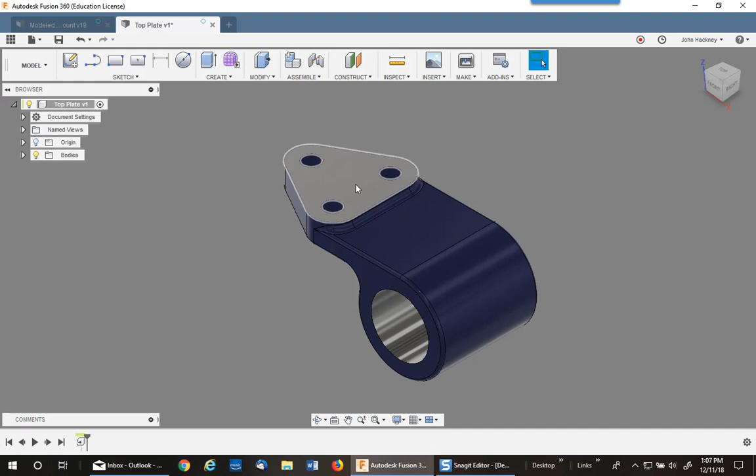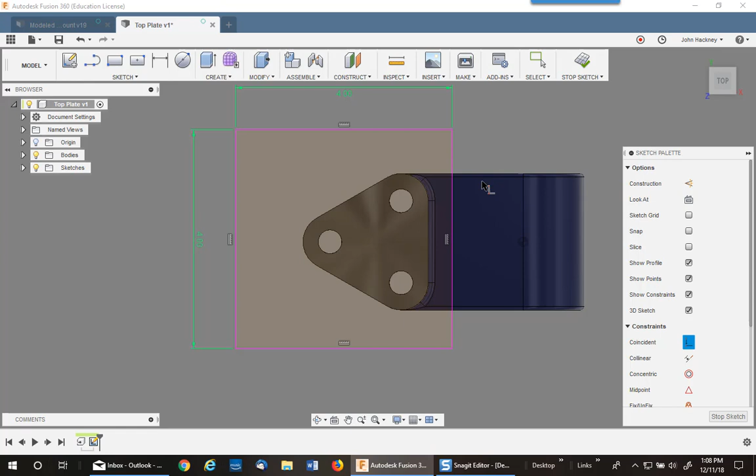Same procedure, now that we've got it into our top plate design, pick on this top surface and create a sketch. Draw the rectangle, dimension on the way, 4, tab 4, and then I want to hook it to the same place, use the same method, use coincident, hold down my shift key and pick on that midpoint and that midpoint. It's fully constrained.

Now create it. Remember, I have to pick all edges. It's always wise to make your features separate. And I want to drag it up a half inch.

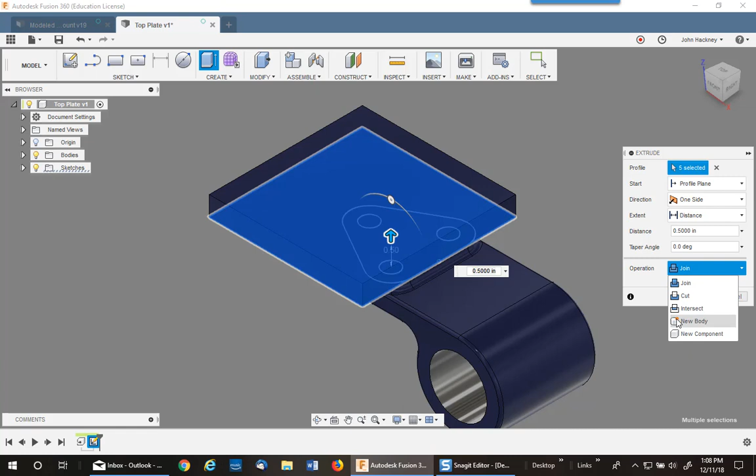I want a new component, or what do I want? I'm already in a component, so I don't need anything except a new body. That's a little different, I'm already in the component. I'm going to make it a new body. Say OK, so I have a component already with a new body.

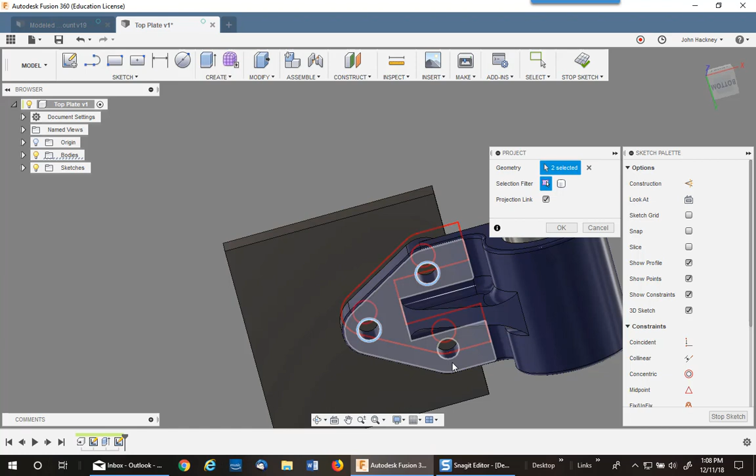Same thing, I go back and make a new sketch on top of that. Turn the part over and project geometry. Again, just do the holes, you don't need the whole surface. There are my centers again.

I'll go ahead now and create the holes. Pick on the holes, and they'll be tapped and all the way through with 3/8 16s.

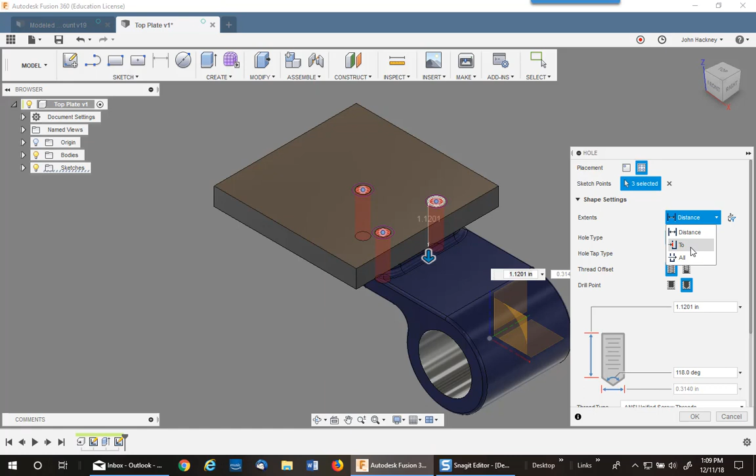Next thing I'll do is put the fillets. Nothing different here. And I'll make it a half inch.

So at this point we've got our finished part, the component totally, as a separate file. Okay, the next thing we need to do is remind ourselves that we have a derived component. That will be used in part of the updating process.

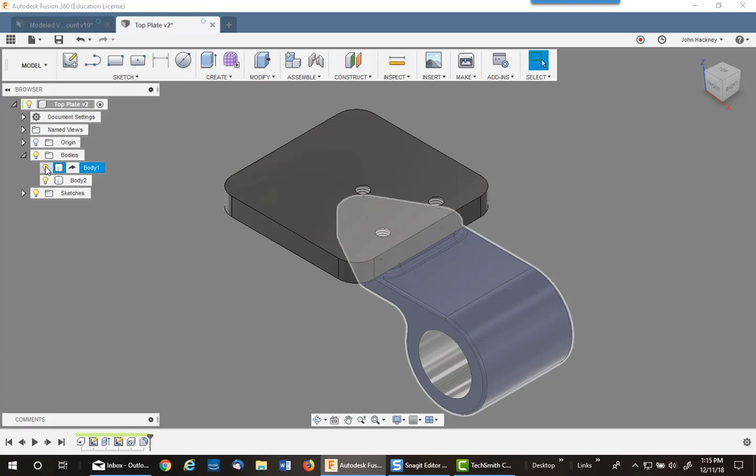Under the bodies, we want to make that body invisible. We then need to save the component to update all those settings. Back to our original assembly, we're now going to link it in. Go to our database, find that top plate, and insert into current design.

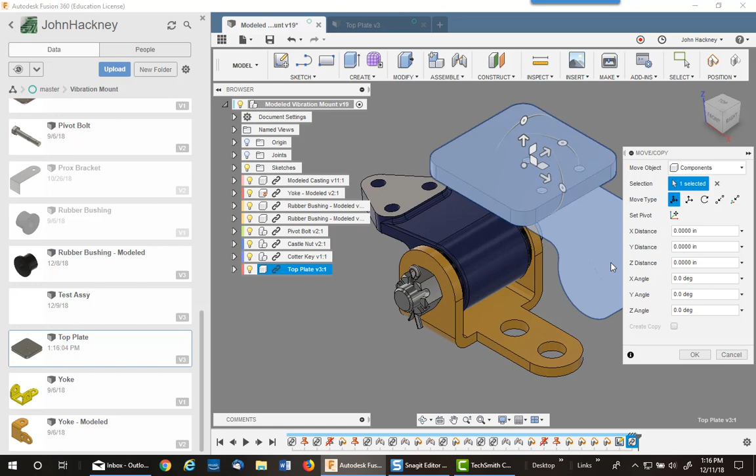Don't let the fact you can see that casting piece hooked to it bother you, that won't hurt us at all. Now the next thing you need to do would be constrain to place. So we can do that simply by doing a joint. We'll just do a rigid joint real quick.

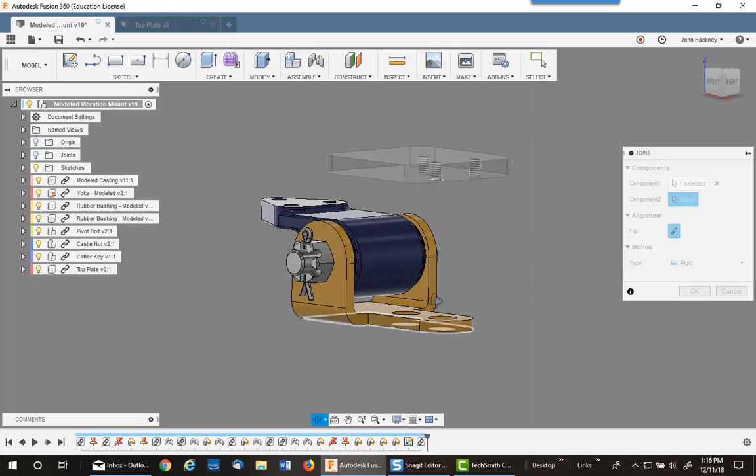From this center to this center and say OK. So there we go.

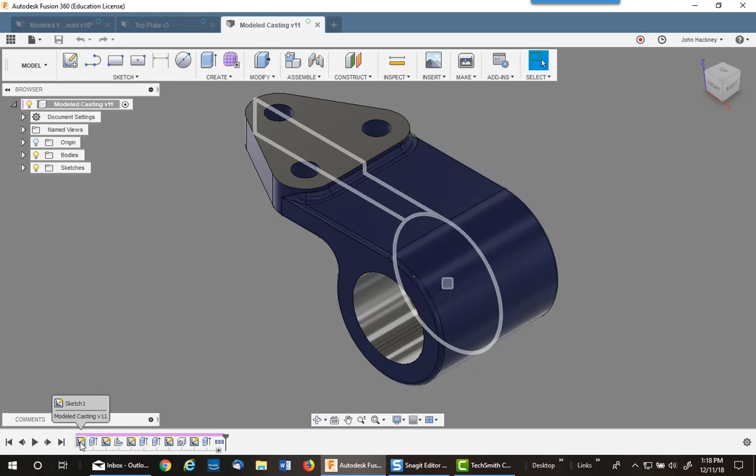As before, let's talk about the adaptive process. Now this is a linked file, so I go to this one and right click on it and say open. Now we're going to do the same thing we did before. We're going to change the sketch from 2 5/16 to 3. Stop sketch, save it.

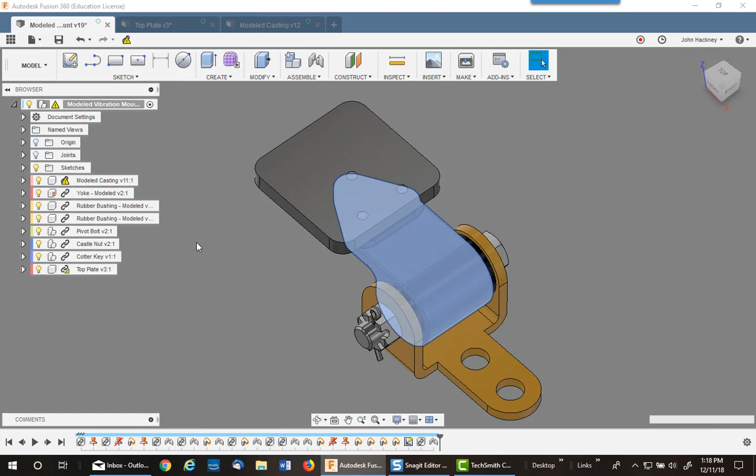Going back to our top plate, you'll see it needs an update, and you'll see the hole move. Going back to the assembly, same thing, you'll see it all updates. So the hole is moved to match up.

Let's do it, go back the other way. Back into this part, I'm going to go to the sketch, change it back to 2 5/16. Stop sketch, and it updates.

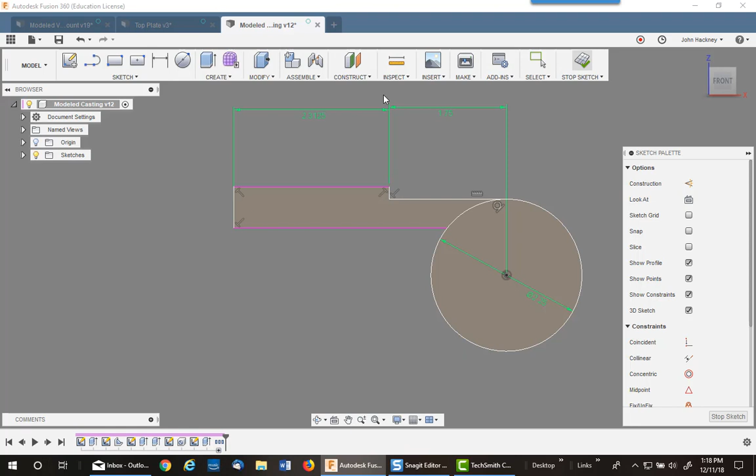Save it, I can close it at this point. Go to my plate, update. The hole moves back, I can close it.

Saving on the way out. And then here it updates also. So you can see the hole moves back.

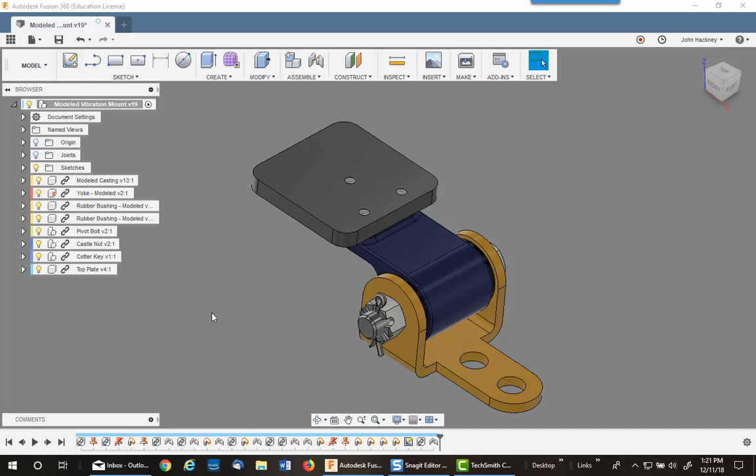Now this one, to break the link, it's much easier. What you do, you right click on the file and open it because it's linked, the top plate. Remember that is a derived component.

What you can do is right click on the derive down here and break the link. As you can see, we have no more, we have the body, you have to leave that there, but there's no more link between them, and the part will not update at all.